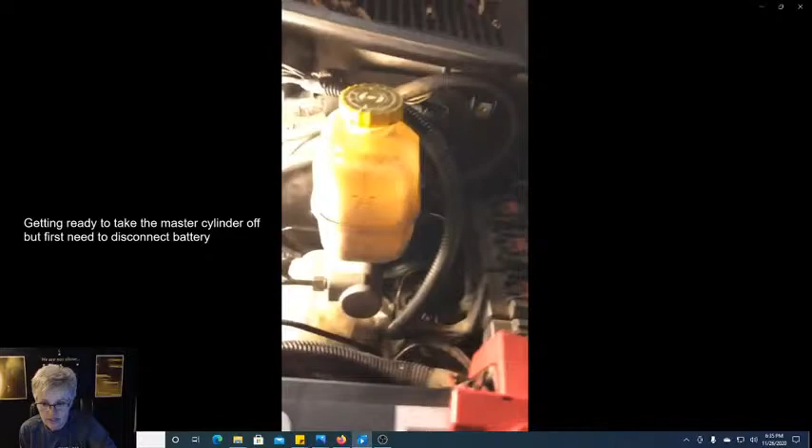What I'm doing right now is I've got to take out the brake master cylinder right here. This little plastic thing comes out so you can take off the reservoir. I've already taken a turkey baster, and let me get this off of there. I have emptied all the brake fluid out of there that was contaminated.

The only other thing I need to do is, once I lift this off, I need to disconnect this brake thing. And I'll also need to disconnect my battery cable, because I don't want to get electrocuted at all. So that's what we're getting ready to do. After I do that, I'll start getting a wrench and taking off these brake lines.

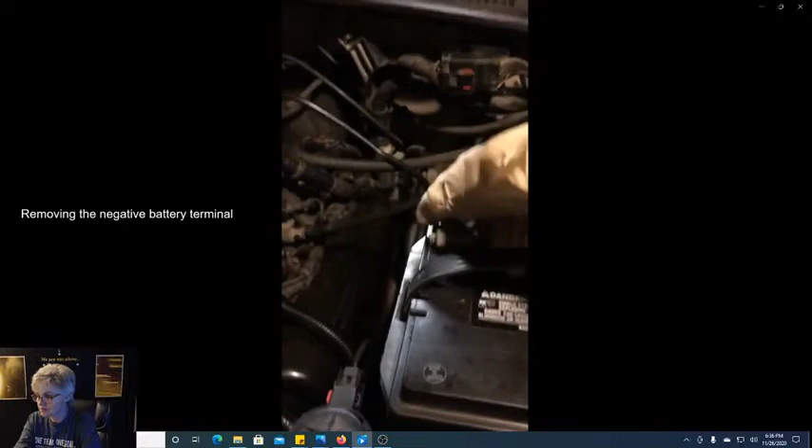I'm removing the negative battery. I'm wearing rubber gloves because brake fluid will eat at your skin if you're not careful. So you want to take off your negative battery terminal.

So I'm getting ready to, I've got this plug off right here. You can see I took the plug off. I'm getting ready to move this bolt down here that's connecting the master cylinder to the brake booster, which is this thing right here. This big round thing is like a brake booster.

Battery's out, so I'll have more room. So I've got this long extension, so I can get that out of here. Remove the bracket that holds on the battery, and I've put the battery over here on a block of wood so it doesn't get drained.

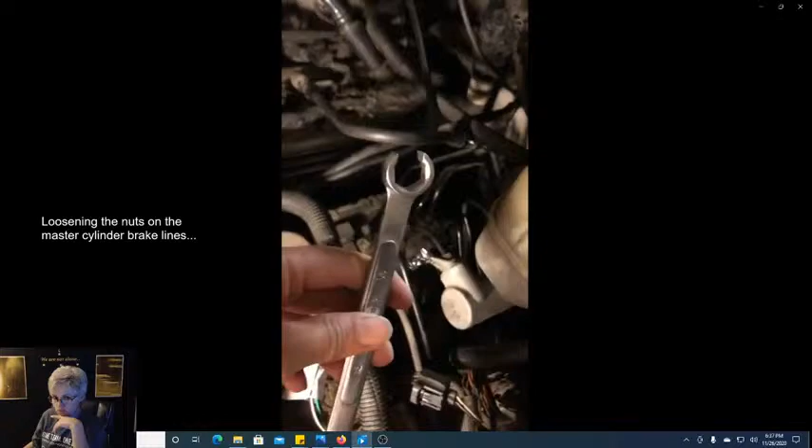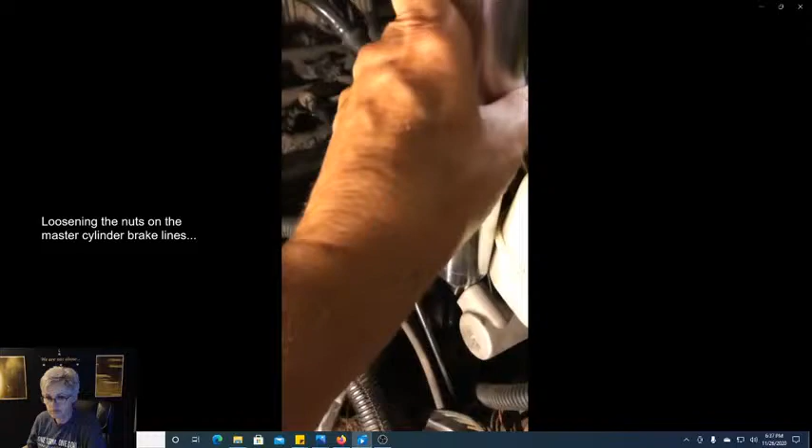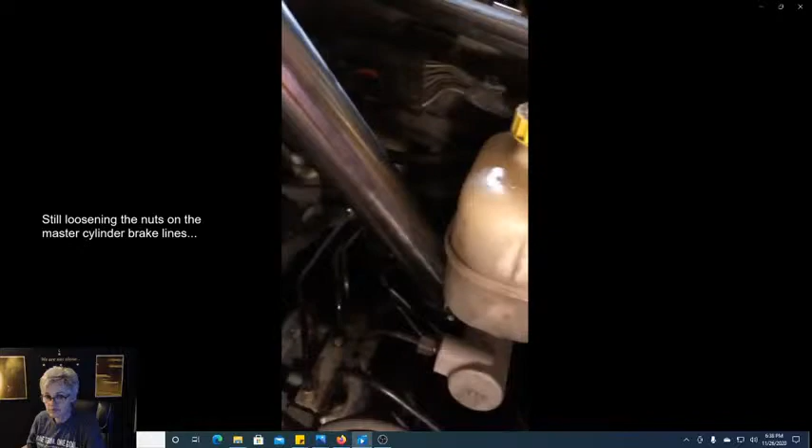So that's what I do. I just do that, and it helps move it a lot easier. No matter what type of tool, if they're really stuck, get you one of those. Got this on the back one. It eases with so much ease when you have a strong arm.

So now I've got this one, you can see, maybe you can see, but this one is loose. Let's move this over here. So I've got these two loose, and I'll be able to take them off.

Yeah, I'll show you a little bit since I've got some light over here. You'll just, my hand's in the way, but let's see. I know people wanted to see me do this.

Here's a good angle. It's good if you have brake line wrenches, but if you don't, well, this is the next best thing. You just loosen those up.

Then I'll have to come over here and take the brake lines off the ABS module. I've got this great big long extension, and I'm going to loosen the bolts on the master cylinder, and I have a strong arm on here too. It really helps a lot, and it pays to have the right tools.

If I can hold that... I don't know if I can, but hold on while I turn this. See, it just cracked itself loose, so that's what you need also. I'm going to get ready and do that, and then I'll get back.

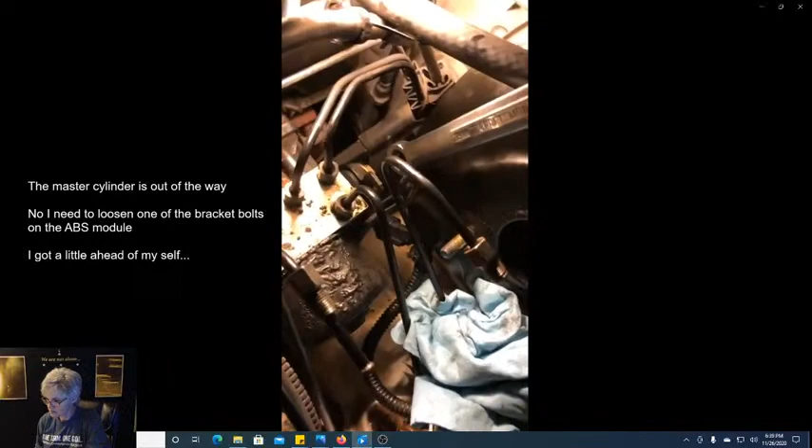So I've got a 13mm wrench, and I just need to remove this bracket. I've already disconnected this clip-on hose for the wiring harness, so that's all I need—this 13mm to take this bracket off, and there are, I think, 2 or 3 other screws underneath there. But I'm not going to loosen it all the way because I need to get these brake lines off.

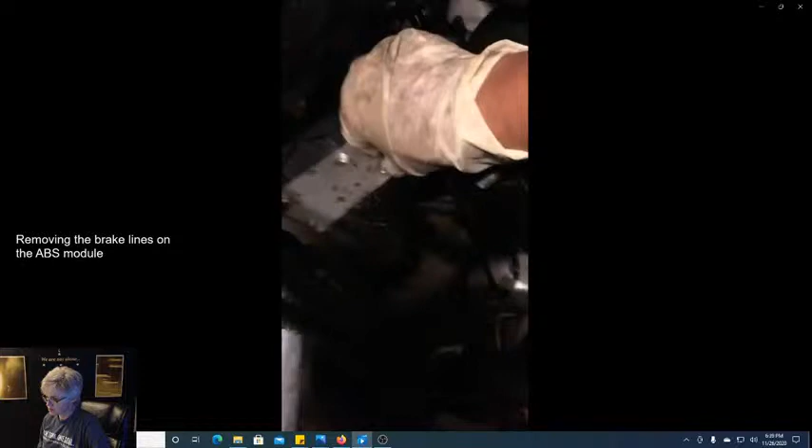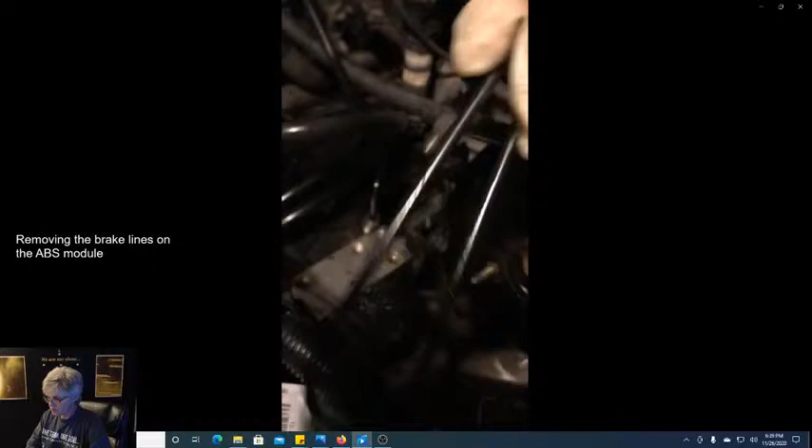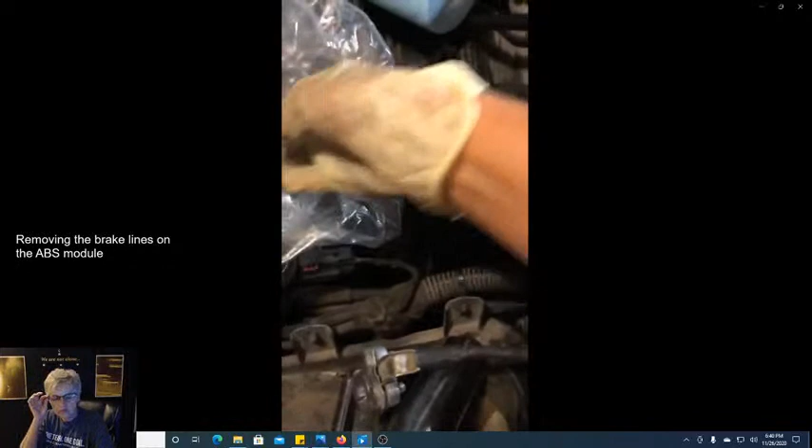Okay, I'm taking off the last of these brake lines that are screwed into that module. What I'm going to have to do with these is clean all these lines out with brake fluid to make sure there's no residual transmission fluid in them. So I'm going to put both of these brake lines in this bag for now, and then I'm going to continue to unmount this.

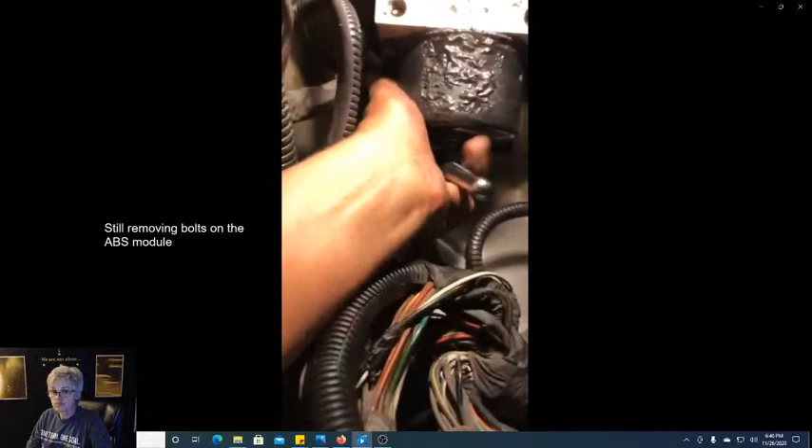Now I'm taking this long extension, I think it's a 12, and I'm getting out the bottom bolt down there so I can lift this up, but I probably can't lift it yet because there are 2 other bolts underneath there. I had to use this small ratchet with the swivel head to get these bolts out because they are so stuck down in there.

You can see, there's 2 bolts down there. This was the furthest one, so this was the hardest one to get, and I had to use the strong arm also. I'm almost got this out.

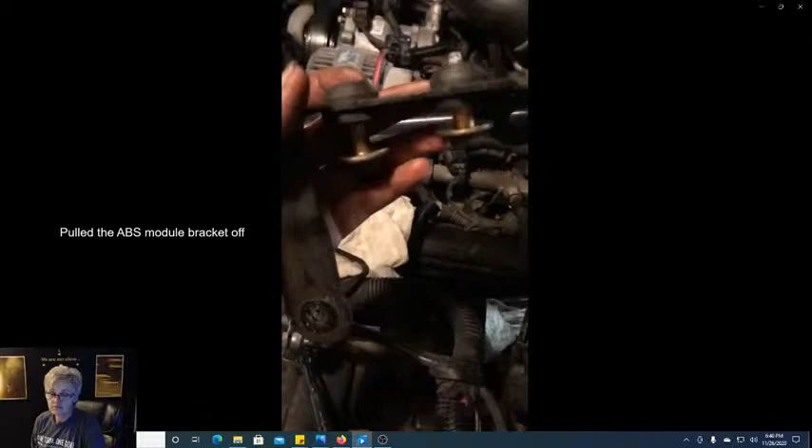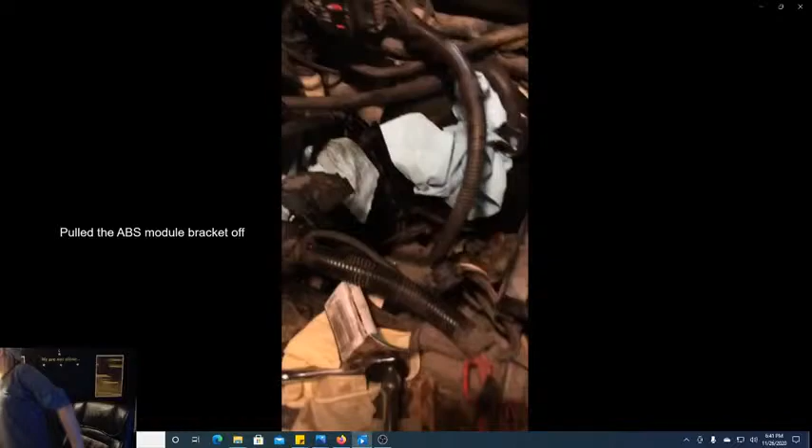Okay, I went ahead and pulled this bracket out. That way, when I put the other one back on that ABS module, I'll be able to just set it right down on here. So that's what we've got going on. I've got the master cylinder out and the ABS module, and I'm going to take a break.

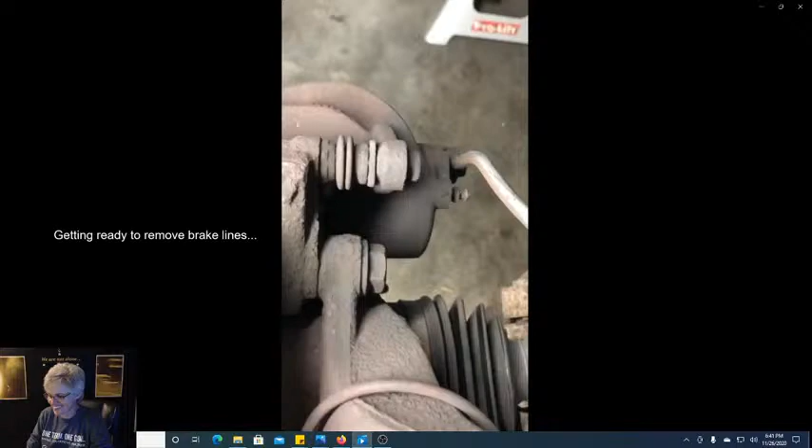Got the vehicle safely supported by a jack stand, you can see it, and I'm getting ready to take off this brake line that runs all the way down from up here. You can see it's the rubber brake line that goes on the back of my caliper, so I'm going to take that off. I want to get all the rubber brake lines off, and I want to flush the steel brake lines that remain.

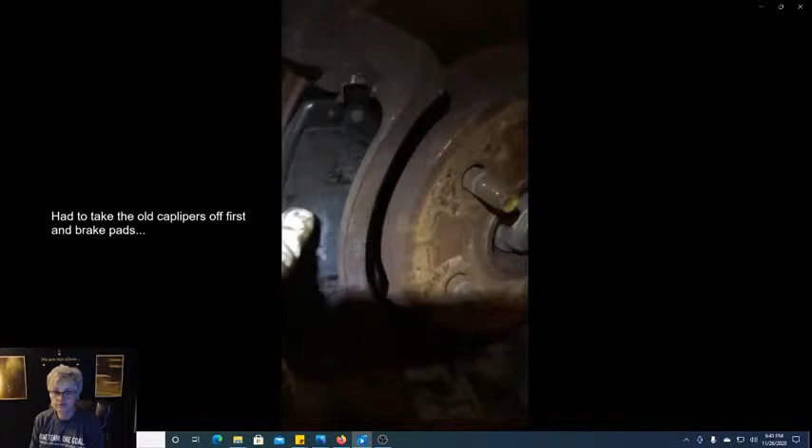Now that I've got this caliper off, this old caliper, I'm going to just take these brake pads out like this. You can see that they're still good, so I may just reuse them, I'm not sure. So these brakes are still good.

Okay, I used a 12mm socket and a rubber mallet to loosen these back bolts right here so I can get this caliper off.

Here's one bolt. Here's the other bolt right here. If I can try to get my headlamp out of the way so you can also see. Here, it's probably good enough like this.

If you don't have patience, don't work on vehicles, is all I've got to say. My husband is not mechanically inclined, so he has no desire whatsoever to get out here and work on these vehicles.

So now I've got this bracket off right here, and you see I've got the whole kit right there. And I can take this rotor off too. Let me get this phone out of the way. I'll take off this rotor.

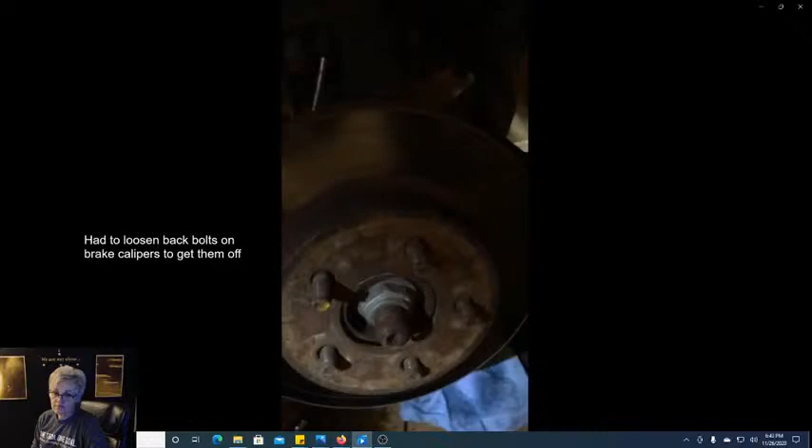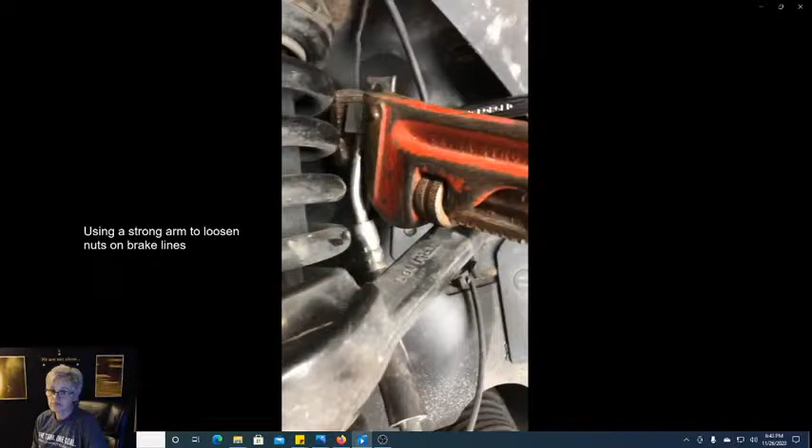I had to put my brake line in this clamp right here because it was moving, so I had to use this great big pipe wrench to give me some leverage in order to put my 12mm wrench on that brake line right there. And I had to use this strong arm to get even more leverage. So you definitely need a strong arm—just get you a real thick metal thing.

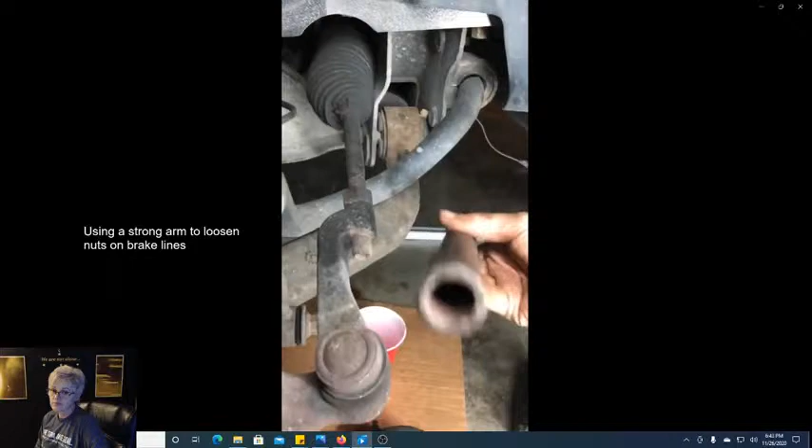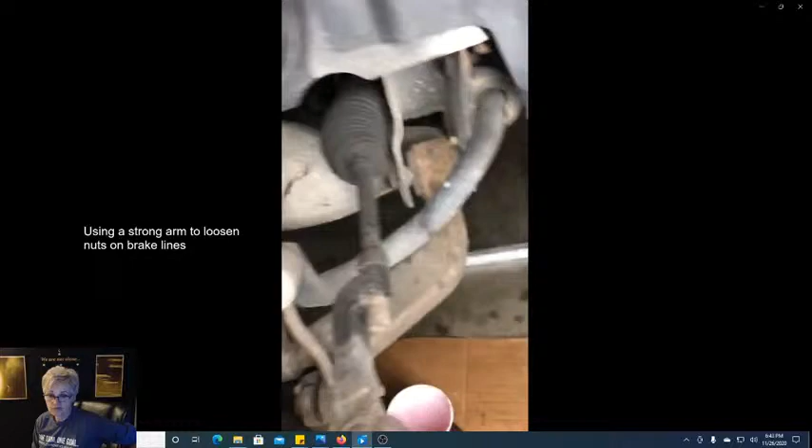You see, I bent this in my bench vise. So any good solid one, around 1 foot long, will work wonders when you're doing stuff like this. I've got the brake line off and I've exposed that, so I'm just going to use this cup here.

It has brake fluid in it, and I'm going to flush this line out. After I flush it out, I'm going to squirt this through here, and it's going to come up through here.

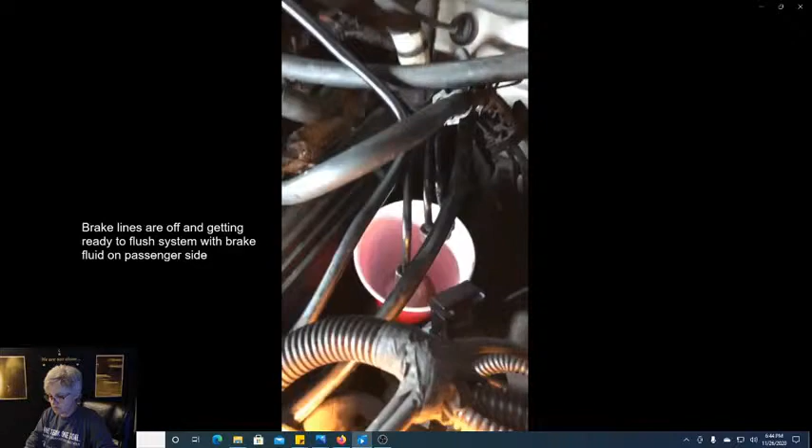These are the 2 lines right there that are over the cup. The brake fluid should come through those 2 lines and end up in that cup. So that's what I'm going to do right now. I'm going to end this so I can use 2 hands.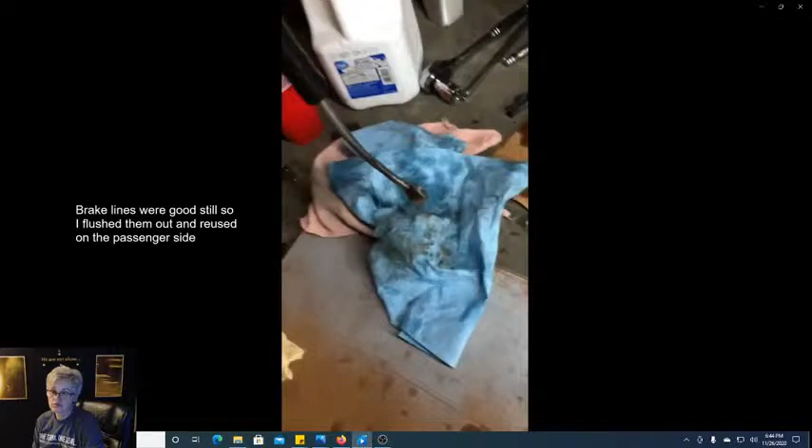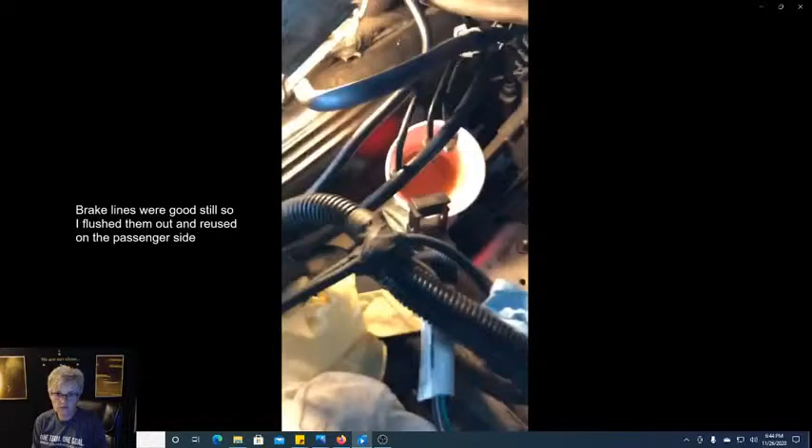Okay, I've cleaned out these brake lines, and they weren't dirty hardly at all. I flushed them out and they're running clear, so I'm probably just going to go ahead and use these because I didn't see anything coming out of them. These were clear too, so I've flushed that one out also. I'll show you the container up here that it went into. Everything is running clear. It may look a little cloudy, but that's been flushed out too.

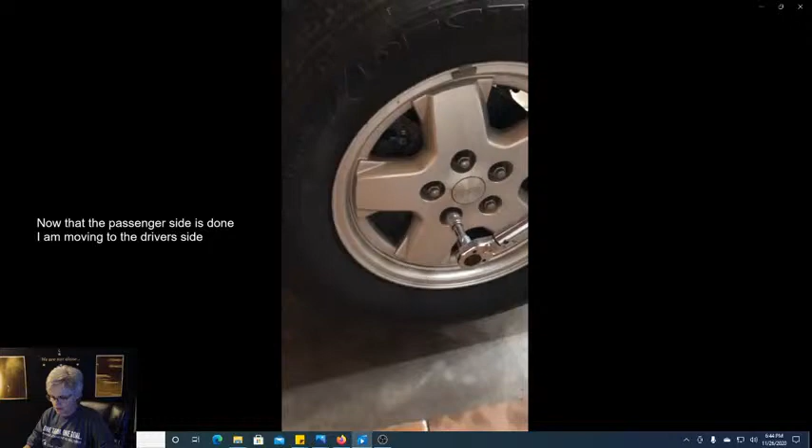I'm just snugging up the wheel to this side right now. So I've got this wheel on, and I can let the vehicle down off the jack stand. But let me tell you, this is an adventure for me, and it's a major task. It really is. I'm taking off this tire right here.

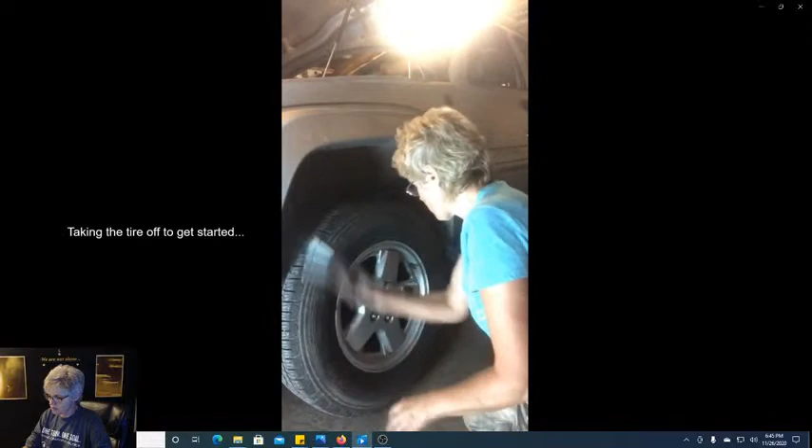This is the driver's side tire, and I've got a great big long torque wrench. Yeah, I'm telling you what, oh my gosh. When I do things like this, I don't even like to stop to eat or anything of that nature. My hands are dirty, which I don't mind. I don't mind my hands getting dirty, but yeah, and I do all the mechanic work myself.

Like I was telling my friend today, I'm self-sufficient. She goes, no, you're self-reliant. She goes, but you do have others who will help you if you need. So that's the difference. I am a very self-reliant individual, is what I am. So, yeah.

So I'm going to flush out the brake lines on this side. That's somewhat too tight. I'm going to put these lug nuts right there. I think I'm going to use this a tad bit more. I have a real great big mechanics wrench, that's a lot bigger than this, but I don't think I have the correct sockets to go with it. I had to get that from my brother, my youngest brother.

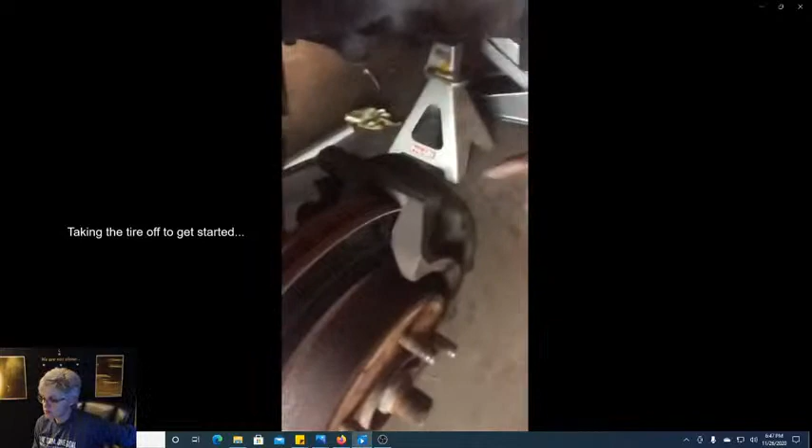Okay, and I'm going to show you this. The brake pads on here, I think they are a little bad. You can see them, they're super thin. So I'm going to be replacing them, and of course going to bleed these lines right here. So that's what I'm getting ready to do right now.

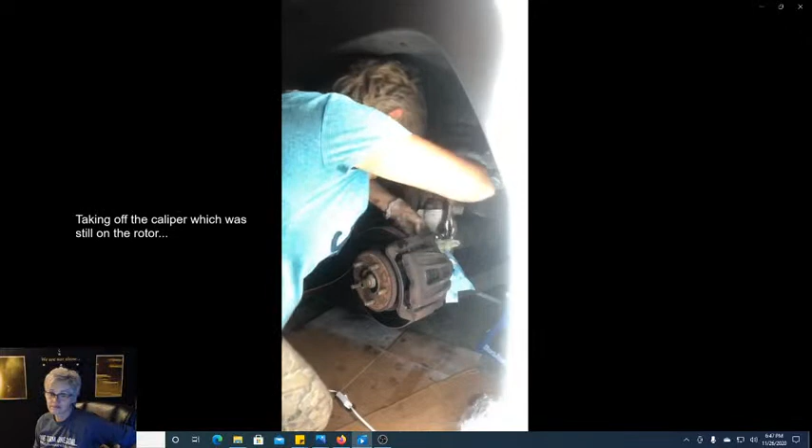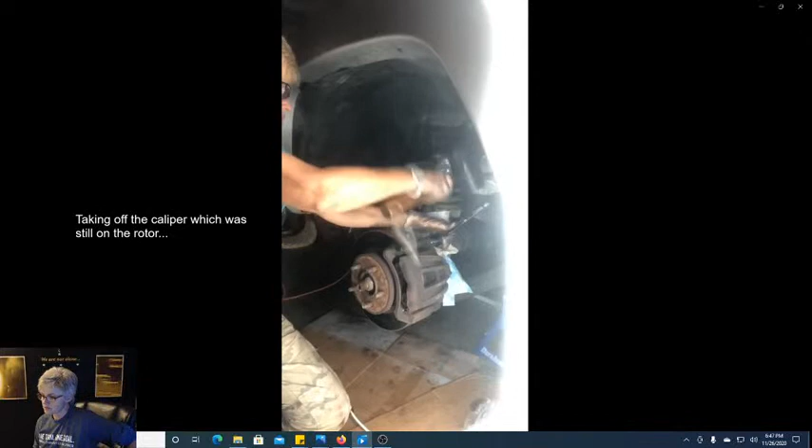All right, I'm going to film this, trying to take this caliper off right here. It's a big one, so let's see. I'm going to have to use the rubber mallet, I just know it, to break it loose because it is super tight.

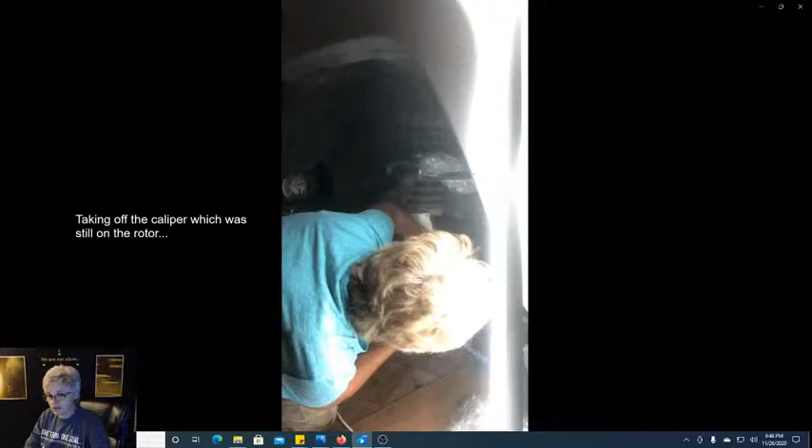Let's find this other one down here behind. Gotta find where it's at. Okay, it's back here. So there, we've got it loose. So I've got that really loose, and now I'm going to get this one really loose, and this should just come off. Sorry about this flare.

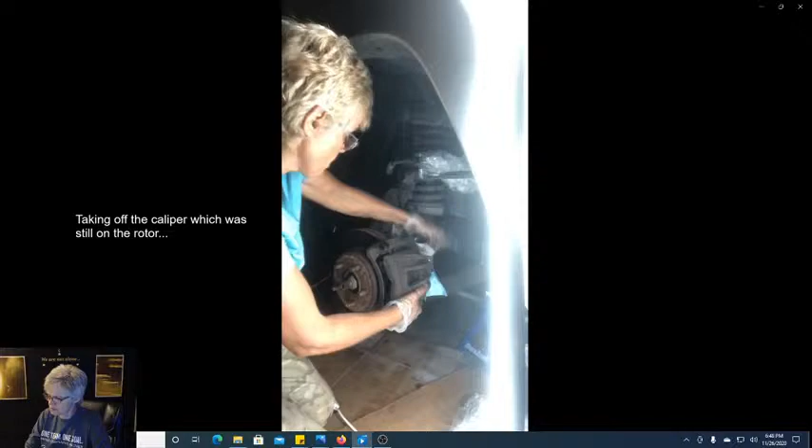No, I can't get it off by hand yet. It's going to be heavy. It is heavy. Well, I'll just take the rotor and everything off, I guess. Whoopsie. So I've got the rotor and everything off.

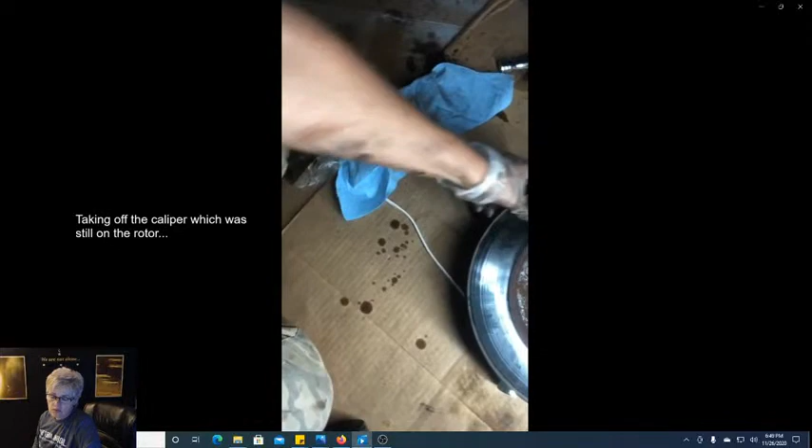I forgot to undo the screw from the rotor, but I'm replacing the rotors also. Looks like this rotor is really worn on the back side anyhow. Let me show you right here, it's got big grooves all in it. I think that's where the brakes were catching, so it's really uneven.

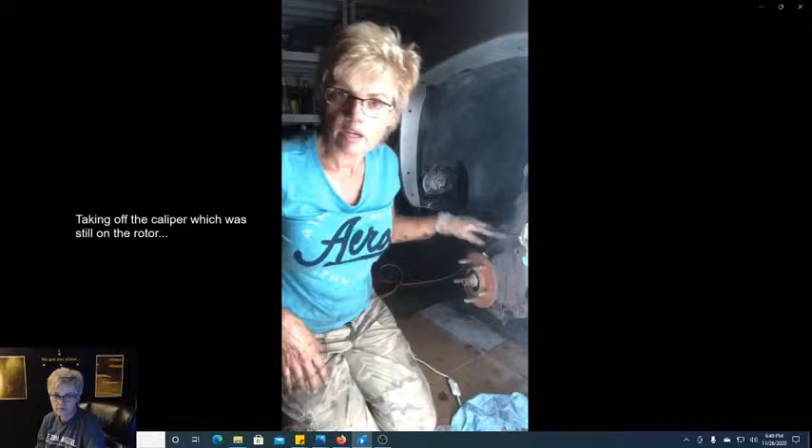So we're just going to turn this off right now, and I am just going to continue doing what I'm doing. Look how dirty this is underneath here. That's pretty dirty. All right.

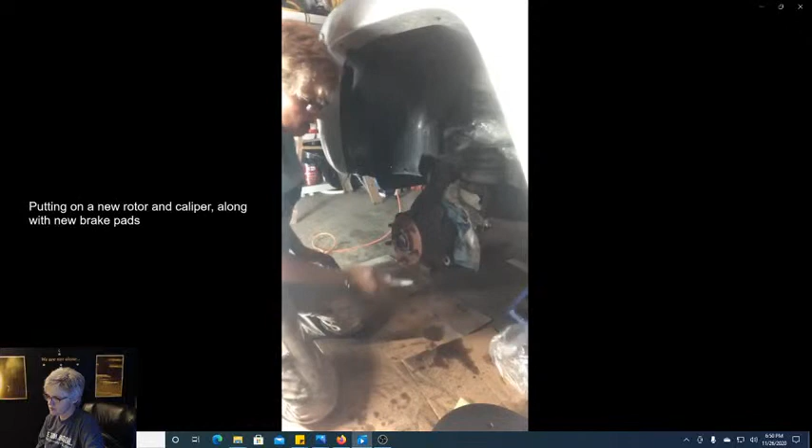Okay, I'm going to put this new rotor on right here. Wait a minute, I want to do something. I got a little rust on these. I'm just going to get some of this rust off on these. You know, I could have done a bearing repack while I had it up like this. I could have took this big nut off and did a bearing repack, but I didn't. So I'm going to put this on here.

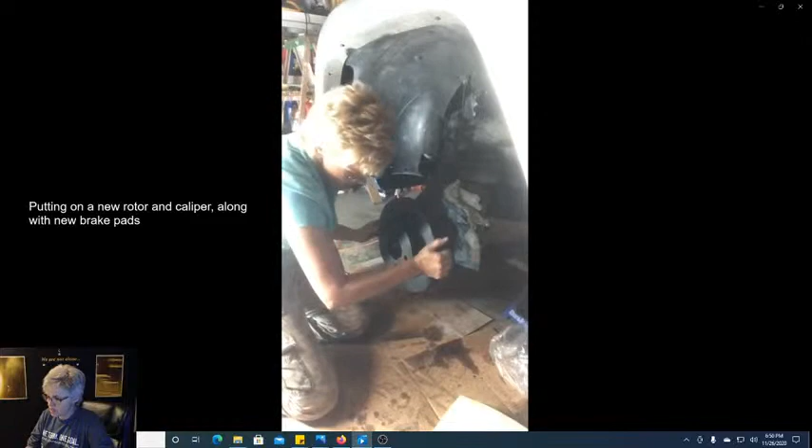Line it up, and let me get in front of it. Because you really do, you got to get in front of these things and line them up to get them on there.

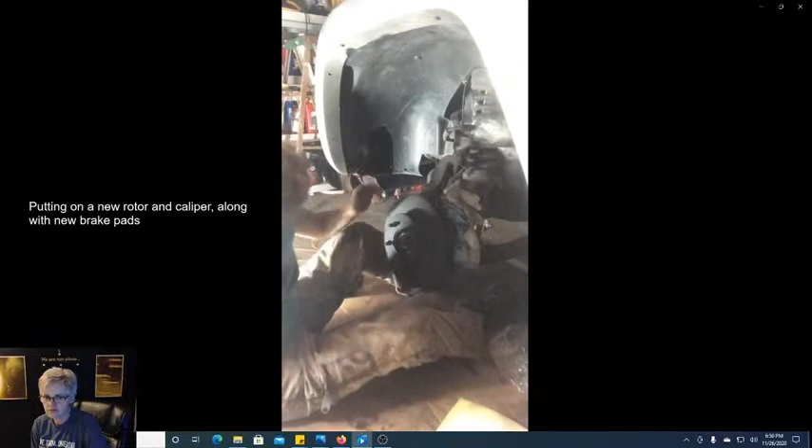I'm going to hold it on with some of these lug nuts, so when I put the... oh my gosh, this one, so much rust on these. Gotta find one that would fit on. I wonder if it'd fit on down here. No, oh my gosh. Some of these, they don't like to screw on too well, but I will screw it on anyhow.

No, no, no, this is... you do want to be able to hold on your rotor. Huh, I guess this one was the one that went on to that one.

Yeah, I'm letting you watch me do this. Let me try another one. What did I do with them? Here they are. I really do want to put one down here. So I kind of... that one doesn't go down there.

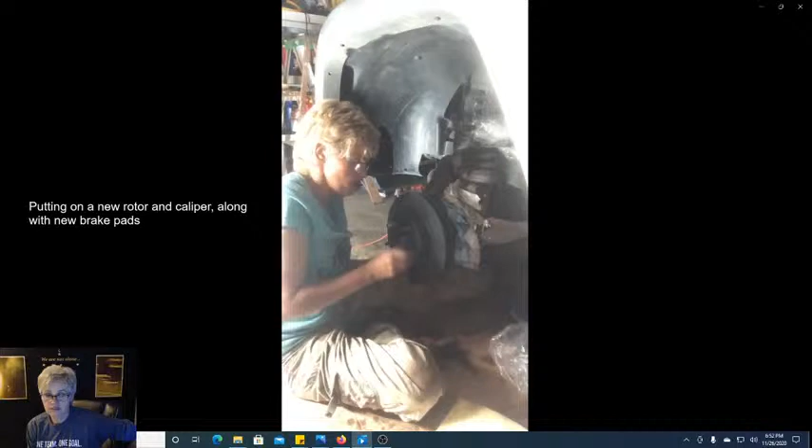Well, I was going to turn it off, but I don't think you want to watch me do this part right here. But you know, you may, who knows? I just need to get another one on the side, whatever side it can go on. Huh, bingo! We got one. We got one now, all right.

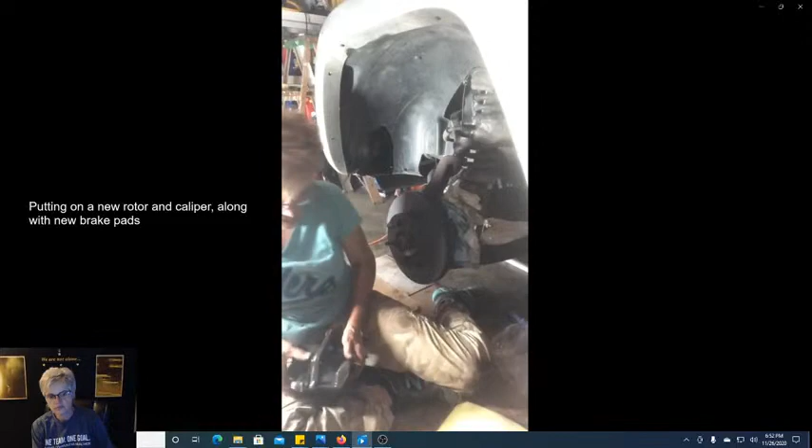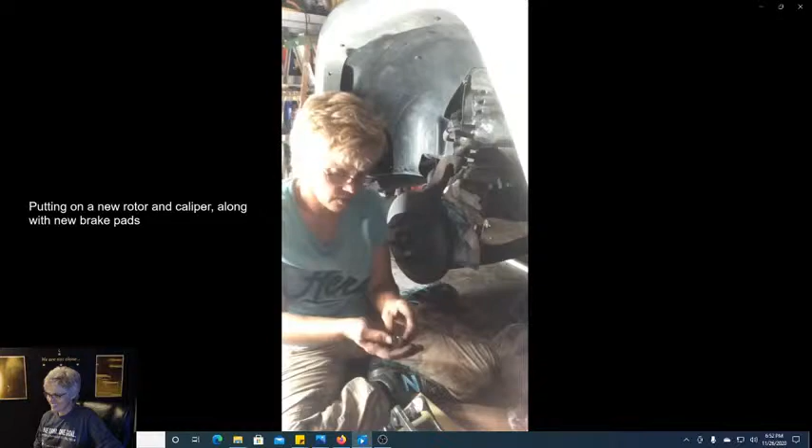Now I got this caliper right here, and I need to put these little tabs in there that come with the calipers themselves. It's just little metal things to help the brakes slide in better. So there's little notches in here. This is heavy, okay? It probably weighs around 10 pounds.

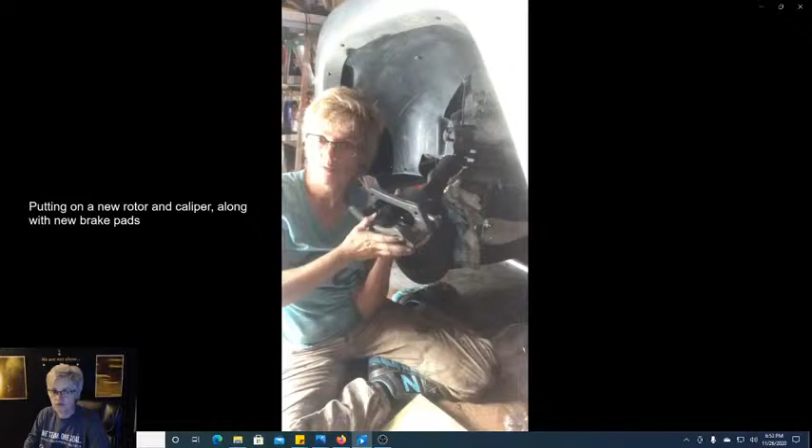There's notches like right here, here, and here in the corners where the brakes slide onto the caliper. So I just got to slide these on here. And you can do it too. Let me, if I could like move this down so you could see it better, but you can't.

Let me see if I can hold it up. Right here, you want to take this outer tab and you want to make sure it's setting. Oh my gosh, you want to make sure it's setting. It's hard to do this with one hand, okay? It really is. So I'm just going to set this right here and watch it so I can get this silly clip on here.

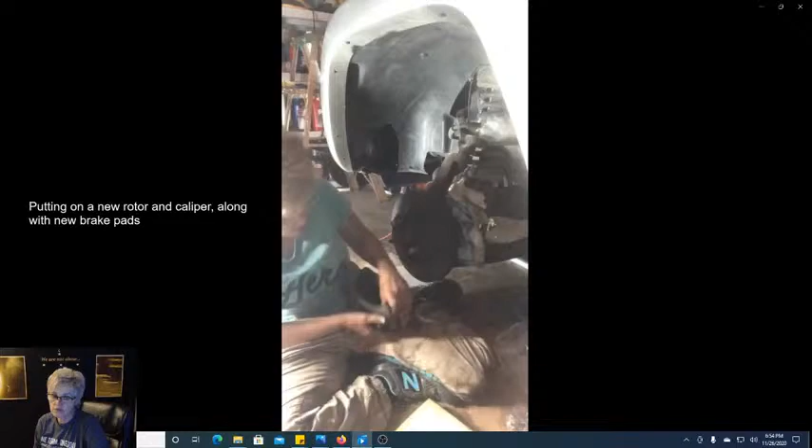Okay, this one doesn't go on that side, and they do go on certain sides. So you want to make sure they go completely down on there and there is no gap. So that's what I'm doing, I'm making sure they go on there without a gap. Nope, that's the wrong side for that one. But this helps the brakes, keeps them from sliding all around.

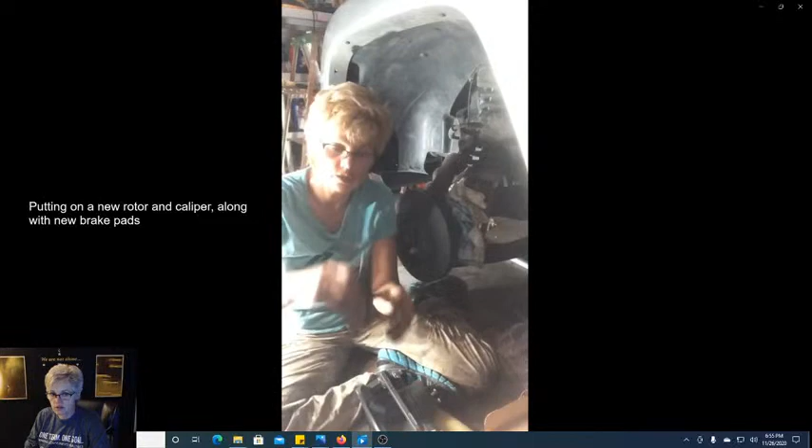Okay, I got that one, and then I'll just put this one over here on this side. Let's see, and now I'm going to put the brakes in the calipers. And by the way, the brakes that I got off there, they're still new also, so I've got spare brakes because they are practically the same thickness. See, they're practically the same thickness, but I'm going to use these new brakes since I'm using new rotors.

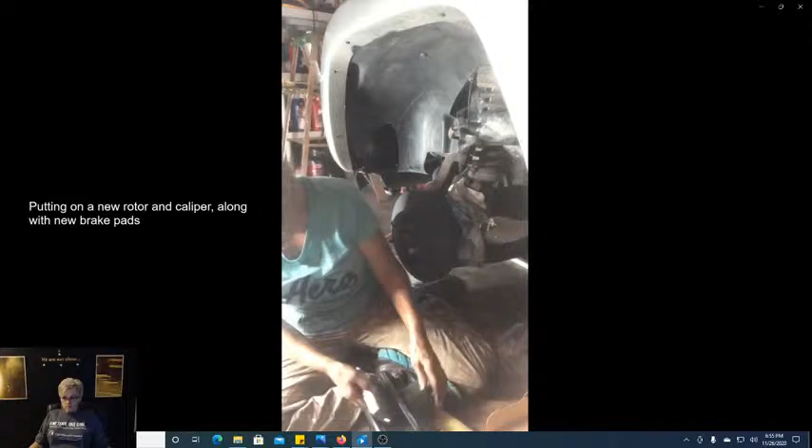I'm going to wrap the old brakes up in this right here, but I'm going to just slide these brakes into here if I can, because they're so tricky. I think these have each side, they might have a side they have to go in too also, but who knows? Ow, yeah.

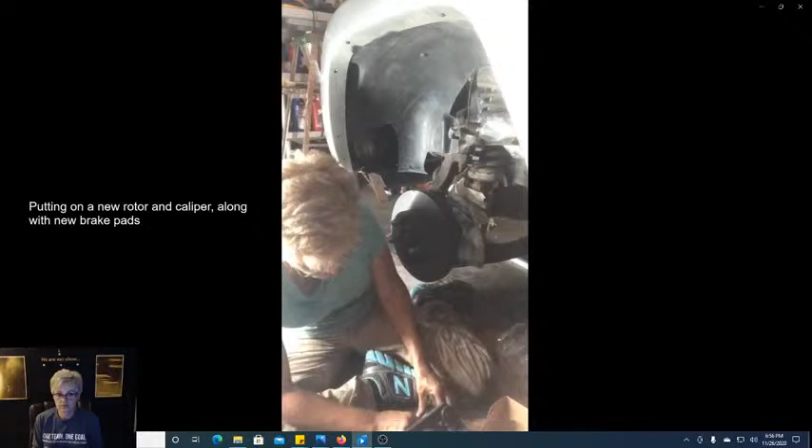It's kind of hard doing this on a video. It really is. Oh, that hurts my foot. I just want to be able to just slap them in there. I got that one in that side, but then I have to get this one in this side. I can do it because I did the other side, but when I'm trying to do this on the video and let you all watch me at the same time, it's a little awkward for me. I just gotta see, one of these sides is bound to have to go in first, and then the other—no, they both go in maybe at the same time.

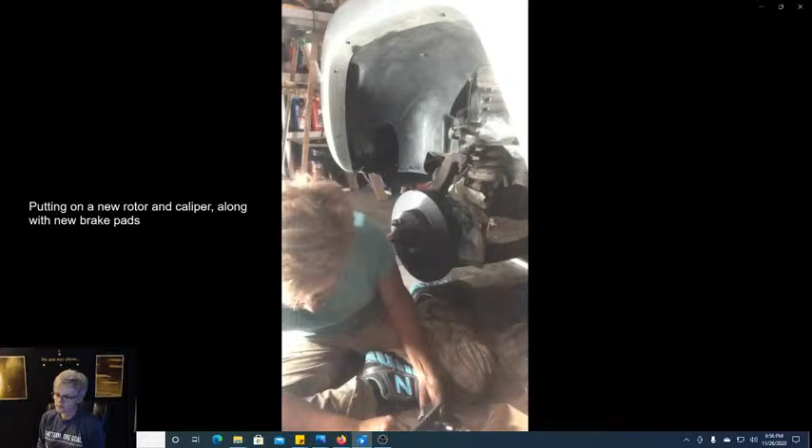Now for this part, I don't really have too much patience. Okay, I got it in. Oh, and you couldn't see me do it, I'm sorry. Yeah, I don't have the camera. Let me see if you all can watch me. I do this one, I'll put this leg down on here. No, now you really can't see it. Well, that's okay, you can watch.

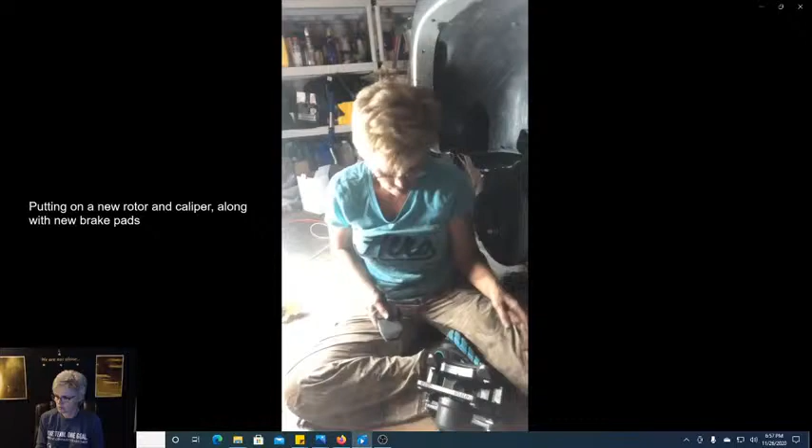I'm gonna try to do this side like this. I got one more pad. No, that's the old brake pad, I'm gonna wrap it up in here. That's the old brake pad. Okay, now this one, it goes on this side, like so. And it really isn't supposed to be that hard at all.

Almost got it. I'm pressing it. Let me put this on here because it might help cushion my ankle.

Now there are people who do brakes all the time and they can just pop these right in there without a problem. Maybe I need to put this end in first, but I think it really probably doesn't even matter. It's just so tricky since I really am not used to doing brakes at all. I really am not. I think I got it in there.

Voila. Now let's watch me put this on here if we can do that. Even though this is heavy also, I better make sure I have my socket ready.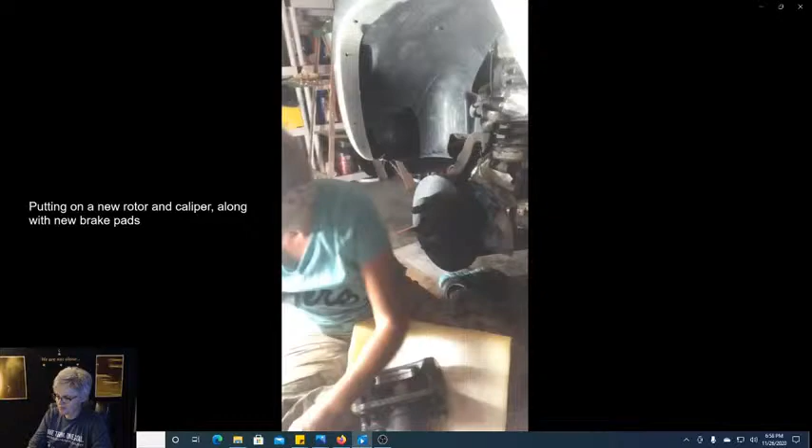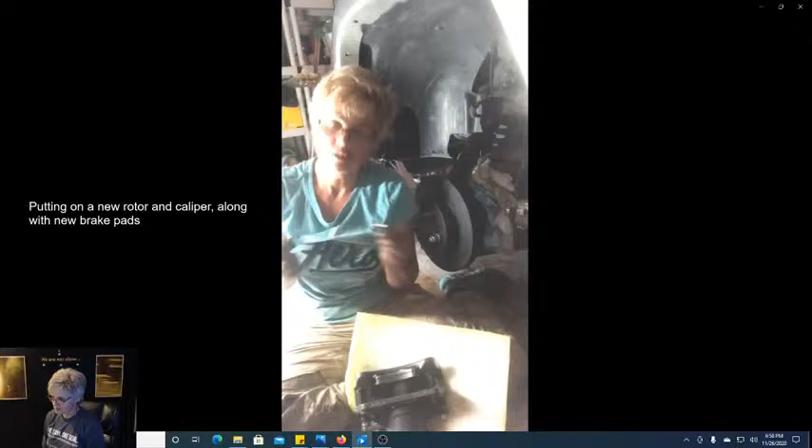Not this one, it's this one. It's a 21 millimeter socket. So yeah, I'm feeling more confident if I let you all watch me do this a tad bit more. But this is how we are going to do it.

If I can find these holes on here. And the good thing about this is, it's heavy. The good thing about this is, I gotta position myself a lot better to do this.

That's not my good hand working like this, but that's okay, that is quite all right. I didn't have any dielectric grease to put on the back of these at all. I just gotta find this hole now. Found it.

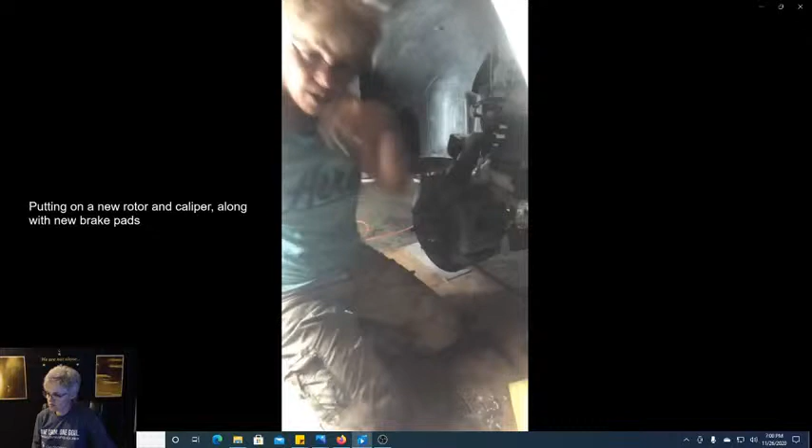I think I found it. Yeah, I think I did. Maybe? I gotta lift this up till I make sure I get this in the hole that it's supposed to be in. Oh, I am not left-handed, so it's kind of hard for me to do it like that.

Where's my 21 millimeter? Right here it is. Gosh. So I'm just going to snug these on here. I'm going to do more than snug them, okay? So that's what I want you to know, they're going to be more than snug on here.

I think I'm getting it on there. Yeah, I am. I'm not going to tighten it all the way down exactly at the moment. Just want to make sure I got it on there. All right, and you know what I'm going to do?

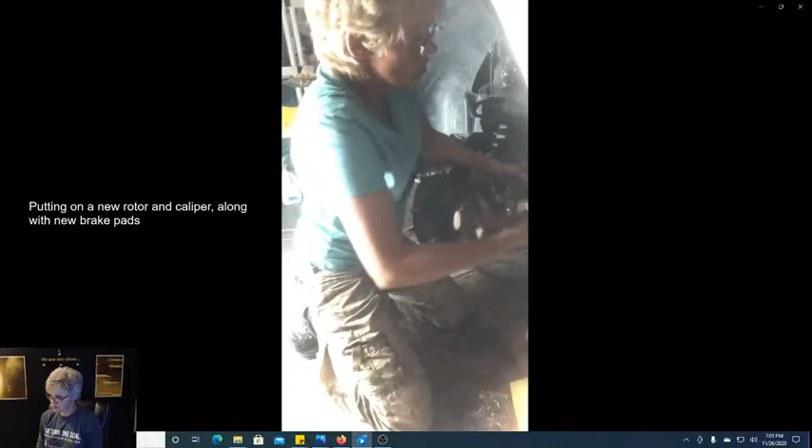Yeah. You know, I'm going to take my rubber mallet and I'm going to beat on it to make sure it's good and tight, because I don't have the kind of strength.

Let's find this other one. I don't have that kind of strength in me to get it super, super tight. I just got to find this. Found it. No, I did not get it on there yet. Okay, I got it.

There, that's on there. Now all I had to do is put on the brake line, which is not going to be too hard to do at all, but I'm going to get off of here. It's 11:55.

Okay, I've got this rotor on and the caliper along with the brake line. I think this is, I don't know what kind this is, but it's pretty neat looking. So now I'm going to put on the tire.

I'm getting ready to take this caliper off and replace it with this one. And there is some grooves in this one right here.

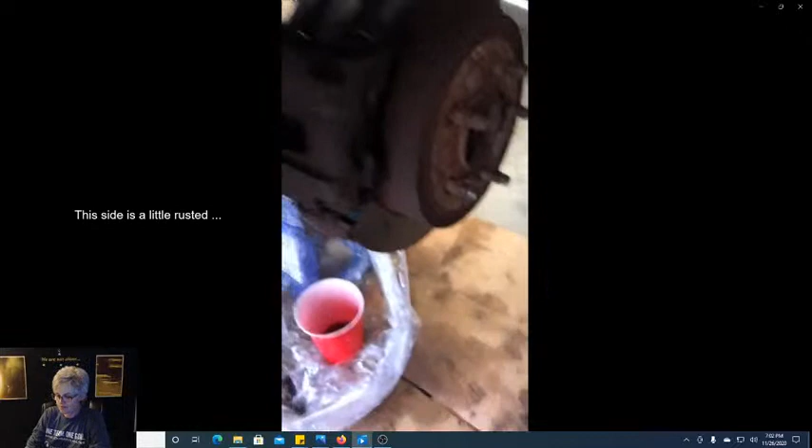So I've got the two front tires done, and now I'm starting on the rear. Now I've had to get this bar because these calipers, they were locked up. You can see, that's why my vehicle didn't want to go nowhere.

So I'm gonna put this phone down and take that off of there. And the pads really are new, it's just the calipers got rusted.

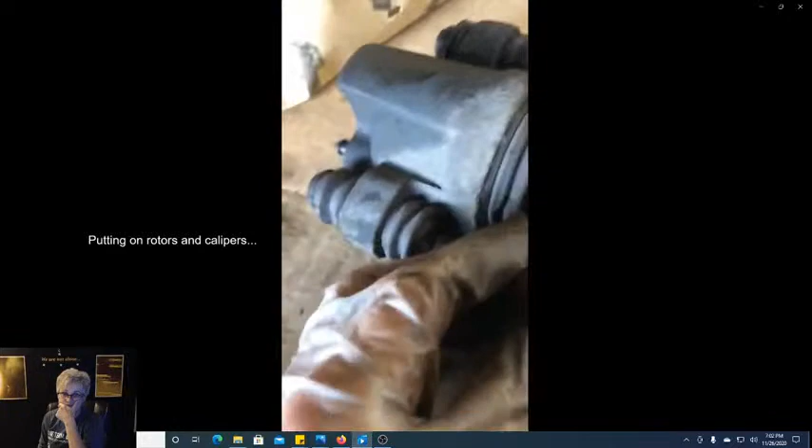So with this brake pad, let me show you. It has one of these like this, and so it had to slide inside of the caliper just like this. You can see the other one like that, it had to slide inside of the caliper.

And then this one right here, it's going to go like so. It's going to have to slide down in there, but I can't do this with one hand, but that's how that one's going to go.

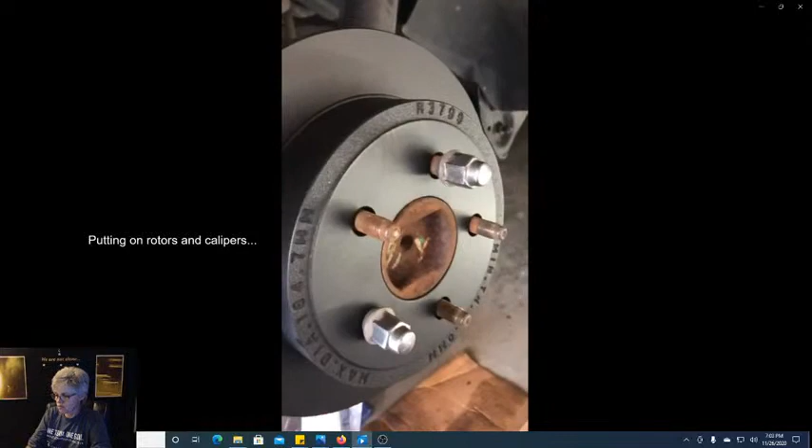These are really cheaply made. Inside here, it is nothing but tin, and it should have been a hub, a complete hub with brake shoes on the inside, but it was not. So I had to take a rubber mallet and gently go like this in order to get that to go down on there like that.

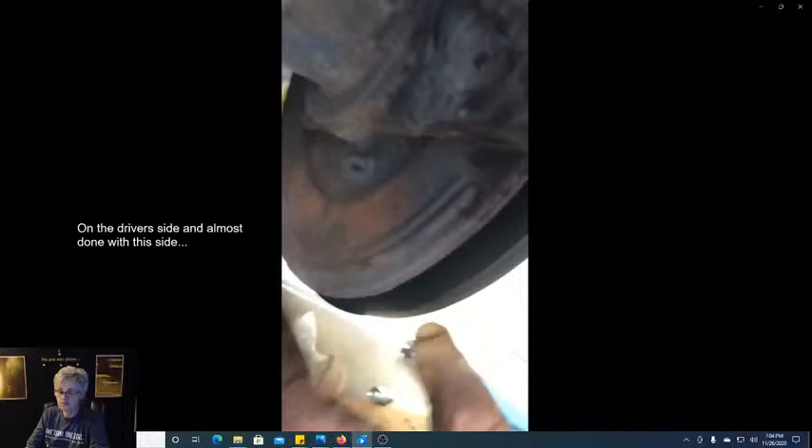Now I'm going to have to put it on here. You know, yeah, that is very disappointing that they just have these fake, really thin parts. You can see how thin this is, that should have been a brake shoe. You look at that, you can see all the way through it, but it wasn't.

Well, I am wild looking. Look at my clothes, I am filthy, even behind. But the good news is I've got the last of the rotors, calipers, brake shoes, and brake lines on.

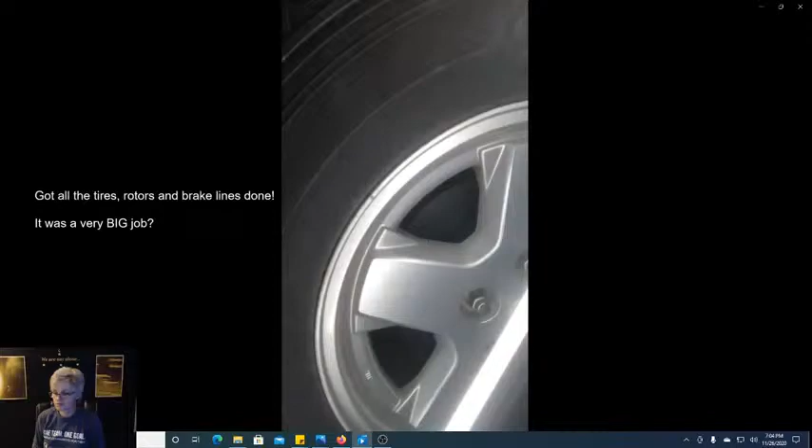Let me turn this around. This was my last tire right here. I know you can't see the new brake pads, but we're going to see it. I don't even know what time it is. I did stop to eat some lasagna my husband made, but you can see I've got new rotors on it and brake pads.

I don't know, I might go ahead and bleed that master cylinder and put it on tonight and connect those brake lines, but I'm not sure. I'm tired. I've been going at this since early this morning. Oh, I wish I could look at the sky.

I've just put the brake ABS module in. I've put the little screws down there, the little nuts on top of this to stabilize it, and I've plugged this in. Now all I need to do is put these lines on right here, and then I'll put the brake master cylinder on.

Okay, I'm just screwing in this brake line with the 12mm open-end wrench. I went and got another 12mm line wrench for fuel line or brake line, but it's not going to work too well for me at this angle, so I just use my regular 12mm.

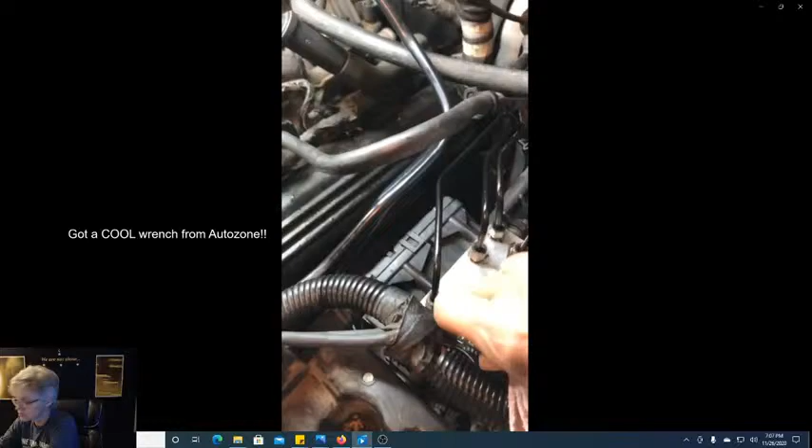This is so cool, I just went to AutoZone. Let me see, look at this - they got a wrench, this is a 12mm, just goes like that since you got a tight area to squeeze around it. Battery in here, I just need to hook it up.

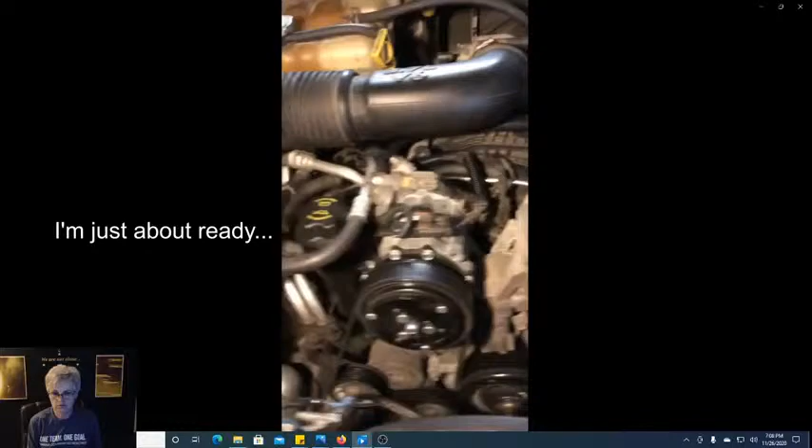And then we're going to try this vehicle out, I'm going to be giving it a try. This was my biggest thing right here, this module - trying to get these brake lines tight enough and getting in this master cylinder. I might need a... no, I think I tightened that up well enough. Yeah, so this is my engine. So say a little prayer that I've got it all fixed.

And there you had it. That was my major - that was the second most major mechanic job I've done lately. I had never done brakes except one time in my life. That was the first time I've ever done anything like that, and I surprised myself. I really did. So you really never know what you are capable of until you try it. See, that's it - set your mind to it and have that attitude, think 'I think I can,' and then you'll be able to do it with help.